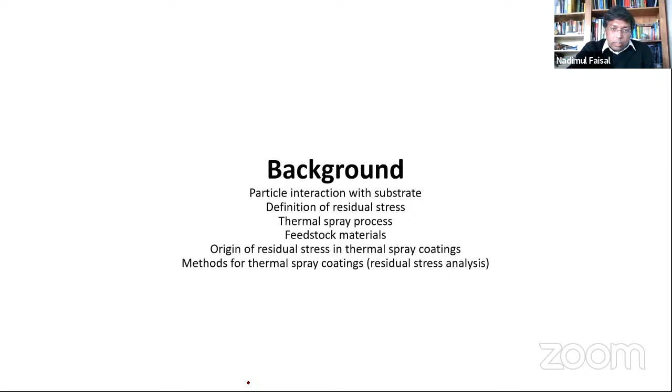I'd like to start with the background in strain measurement, touching upon some of the basic things. Let's see what happens in thermal spray. To start with, we need to know why residual stress analysis is important. We don't want to go into detail, but adhesion, fatigue, and other tribological behavior are very important for such coatings or any material. So residual stress is important. Now, in this presentation, I'll be talking about how to measure it, and what different techniques are available.

So there are 3-4 techniques I have prepared. To start with, we know that in thermal spray, you've got particles at very high velocity and temperature, which interact with the surface. Now, the surface can be of various shapes and sizes. Here you can see on screen, it is a thick sample or thick combination with a thin sample. You can be spraying in corners or bends, or you can be spraying on rollers. So in all these cases, the geometry and shape of the substrate will have an impact on the strain which will build up during thermal spray.

So there are a number of factors which can lead to net residual stress. These can be different thermal spray techniques, process parameters involved, as well as the temperature and rate of cooling between passes. If you're doing preheating, or post-treatment heat treatment can be done, service loading, shot peening, as well as the coating material and substrate materials - all these will have an impact on the final coating manufactured.

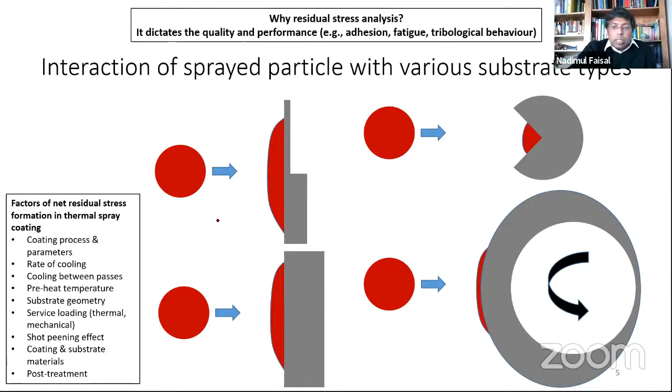Right, so this is what happens. Now, if you see on the screen, the desirable shape and size is the one you are spraying on. But during this thermal spray process, something happens at a very small scale. Some deformation will happen because of spraying at high temperature, and then you end up getting a substrate or sample which has changed in a few minutes or seconds. However, when you develop your process parameters, you assume a number of things. So you assume the substrate is constant, with particular properties. However, these things change during the thermal spray process.

So most of the research and development work done is on flat test coupons. However, when you deploy in real life, they are not on a flat substrate - it would have a different geometry, shape, and size. And because of that, that leads to uneven residual stress buildup. A lot of things are unknown if you're spraying on corners, bend curvatures, or grooves. And from my experience, I know that residual stress is not a common testing protocol in industry, either because of lack of resources, expertise, or maybe lack of interest.

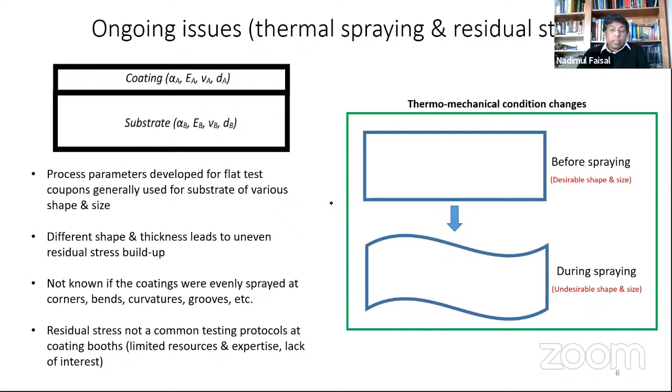So if we do a Google search looking for what sort of shape and size thermal spray coatings are done, we come across - if you just search for ball valve thermal spray - examples where you've got different shapes and sizes. So if it is different shapes and sizes, the thermo-mechanical conditions will change, and that is a problem here, because that determines the quality of the coating.

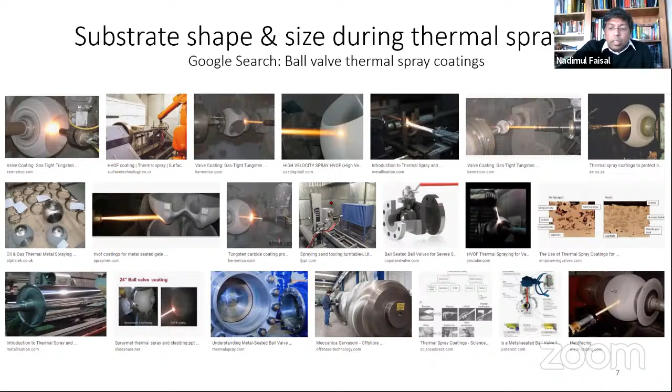In particular, if you're dealing with coatings on ball valves, you would know these are a very expensive set of coatings. And if it is not properly done, and if you operate these ball valves with little contact with the accessories or contacting surfaces around, it can scratch the surface, which can lead to permanent deformation, micro cracks, a groove, and that can not be helpful. So then you have to replace the ball valve, or you have to replace the coating, and that is an expensive process. In the UK, it can cost you many thousands of pounds.

To start with, residual stresses are internal stresses which exist in the material part without the application of any service or external load. These can be induced during manufacturing process, and there can be global stresses, or macro stresses, or they can be ingrained at grain level or atomic scale.

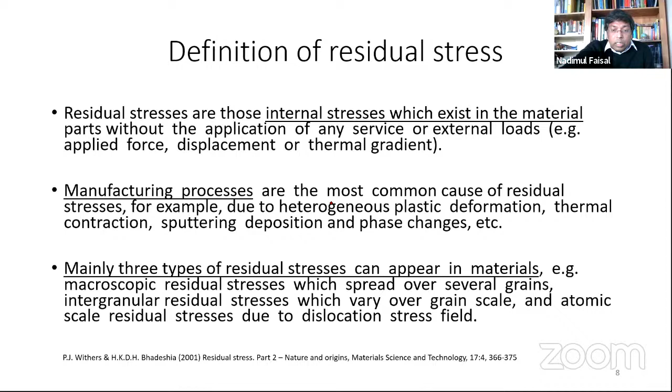A lot of work has been done in this area, and there's a lot of literature available. I would like to read this article, the original source of these definitions, as well as a number of textbooks if you want to know much more about residual stress. In the last 20 years, some standards have been developed. You'll find drilling and X-ray techniques, but you will not find neutron diffraction-based standards, because it's still in development stage. So if you are interested, this may be a good starting point to know about residual stress methods.

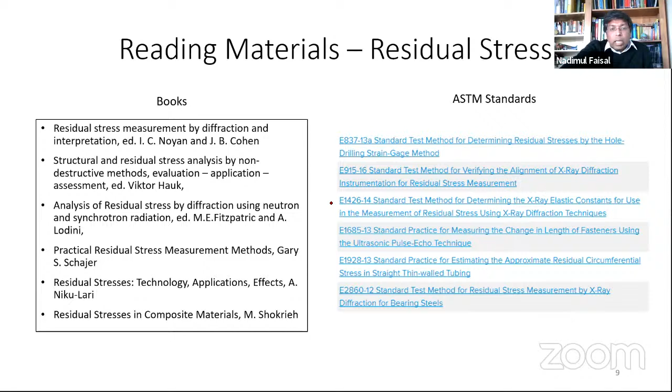In thermal spray process, what happens is the powder particle or feedstock material is sprayed in an environment at very high velocity and temperature, which propels through the environment, and the particle lands on the substrate. Then, layer by layer, you can build the coating.

If you spray only a few particles on the substrate, you can see in the image here it is a grit blasted surface. What we did is try to spray and then see how it will go deep inside those blasted areas, because that will form a mechanical interlocking, and that is what happens if you want to improve the coating adherence with the substrate. So this is the image we tried to capture.

Now, all of this, the first layer, is very important because that is interacting with a different material with different mechanical properties. So the adherence at that point of contact is very important.

As you manufacture the substrate, it will have an impact on the surface you produce. Grit blasting will change the surface properties. Some of the strain will change at a very small scale, but it does have an impact. But these are necessary - if you don't do grit blasting or roughening of the surface, the coating will not adhere. So these are the natural processes we have to follow.

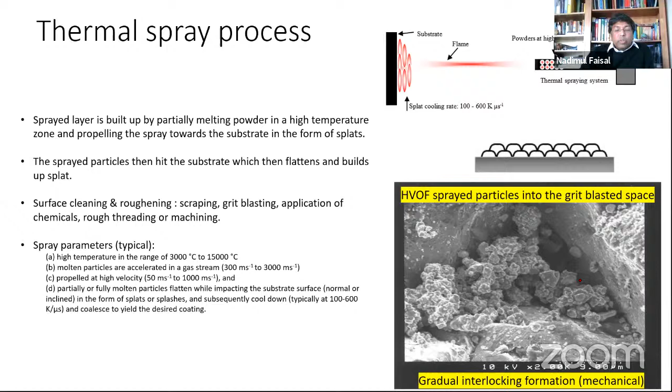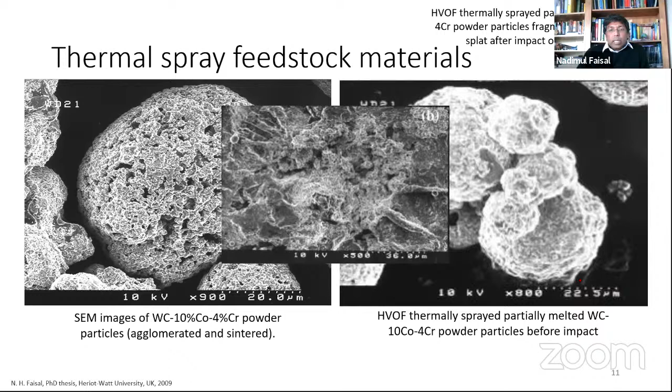The examples of powder particles on the left side are before you spray, and on the right side when it is going through a spray and before it lands. We collected some powder particles, and you can see the surface is partially molten and a few particles are joined up, and that will eventually land on the substrate and form a splat-like structure. So either it forms a proper splat or it can disintegrate into smaller particles. In the first layer, it will interact with the rough surface, and that is where the mechanical interlocking would happen.

To understand what happens theoretically, we did some work using molecular dynamics simulation technique. The first work we did with Dr. Saurabh, where we investigated copper powder particle on copper substrate. A couple of years ago, we did a project with our group's final year project students, where they did a simulation on multiple particles sprayed onto a substrate.

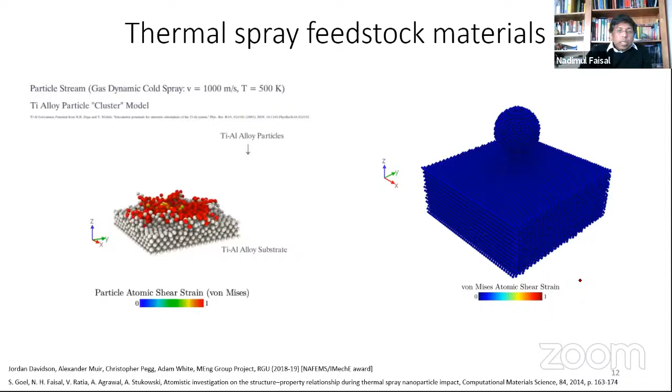You can see as it is sprayed, the strain builds up. Based on the size of the particle, you can see some of the features in it. Here on the right side, the particle size was large enough - you can see how the strain forms and where it forms.

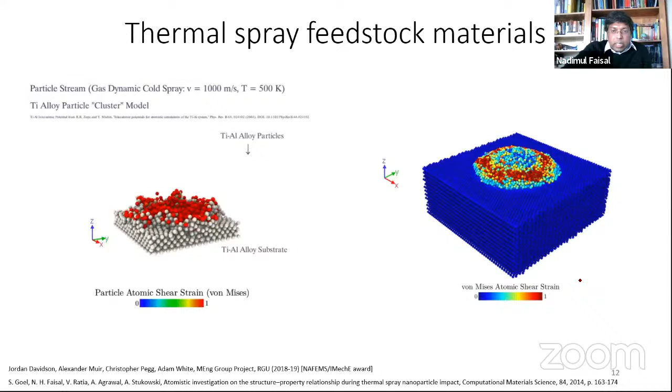These are important things to look into if you are thinking about developing coating of very small size. As well, if you work out for one layer, you can have multiple large particles sprayed, and you can get the strain particle by particle or layer by layer. These are some of the recent work. We know there are about 10 to 15 total publications in this area where molecular dynamics has been investigated for thermal spray application, so there's a lot of scope in this area.

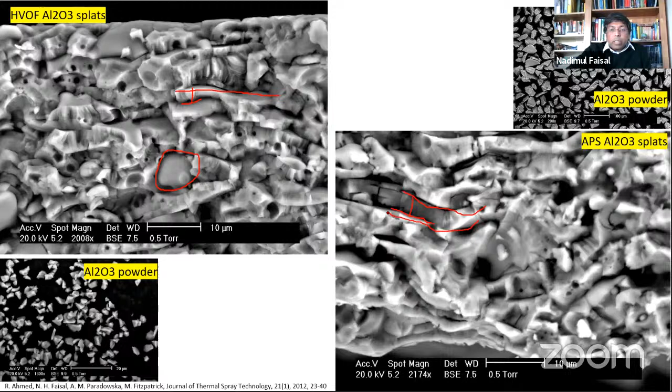And alumina, you know, is a very brittle material. Now think about these getting sprayed layer by layer. These are not so uniform. The splats are not so uniform, but there are some patterns you can see. So these would have a huge strain because these are sprayed at very high temperature, so the strain will be significant.

Assume you're using this coating for some tribological loading or application, applying some load on the surface. Because this is a brittle material, the load will not transmit to the next splat. So it will apply load and it will crack. Whatever you observe, you will be observing the failure on the surface, on the top few splat layers, because the load transmission may not be so easy. So you may not get proper tribological properties of the thick coating itself—it will be mainly surface properties.

However, if you're using a different type of material which has got some ductility as well, the load transmission will be different, so tribological properties will be different. Now, with this inbuilt residual stress, that will have an impact on the overall failure of the coating.

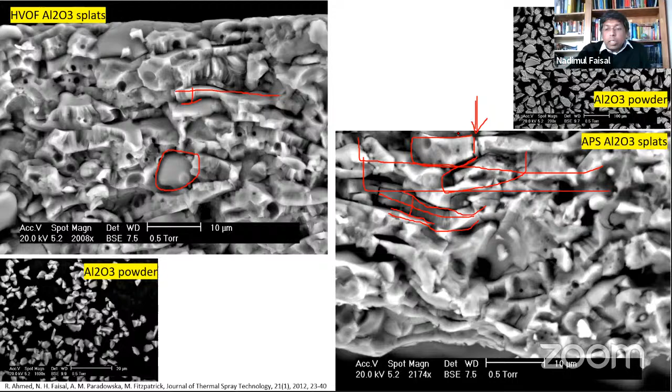In thermal spray, there are some factors because of which residual stresses build up, and those few I would say are: the quenching stress, the peening effect, the deposition temperature, and the phase difference. Each of these, in combination, will have an impact on the residual stress buildup.

So assume you have got a single particle landing on the substrate. Because of high velocity, you're likely to see a little deformation—plastic or elastic deformation, both could happen. The particle will become flat, and then the particle will have a quenching stress. At the same time, phase transformation could happen.

That can lead to a volume change. As soon as the volume change happens, the strain will build up. Then, based on the velocity and temperature, local bonding will happen with the substrate. So a lot of events are happening in this small volume, and that is very important—a lot of data is getting generated.

And then if you build up layer by layer, powder particle by particle, you can end up getting a thick coating, and eventually you will get a macro residual stress. Right, so that is a bit complex.

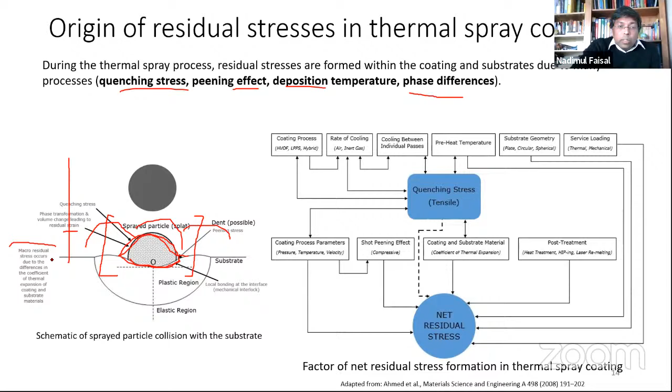If you keep spraying layer by layer, in the first layer, the first few powder particles would have been sprayed on the substrate, and I've just described what could happen. Assume you are building a single layer of a thick coating, and then you have got a number of layers.

Now, as soon as you spray the second layer on top of the first layer, the substrate material has changed. The temperature has changed. The substrate has become thicker. So as a function of time, or as a function of spray passes, the properties of the substrate are changing.

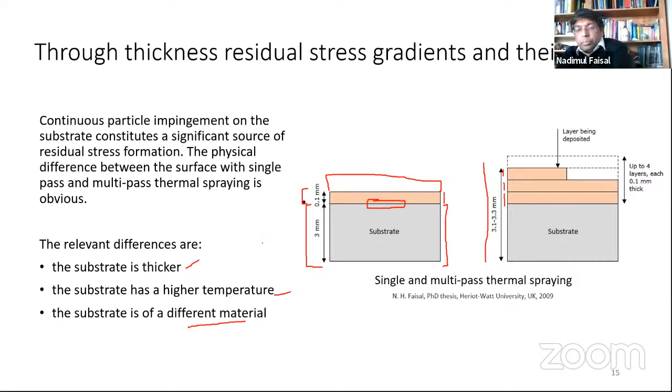Now, I've shown you an example before that with different geometry, shape, and size, things have different thermomechanical properties. We develop some process parameters based on a typical steel or titanium alloy substrate, but you are not designing your process parameters for a new layer which has got new properties. That is what happens in real life, but if you look into the physics of it, that changes.

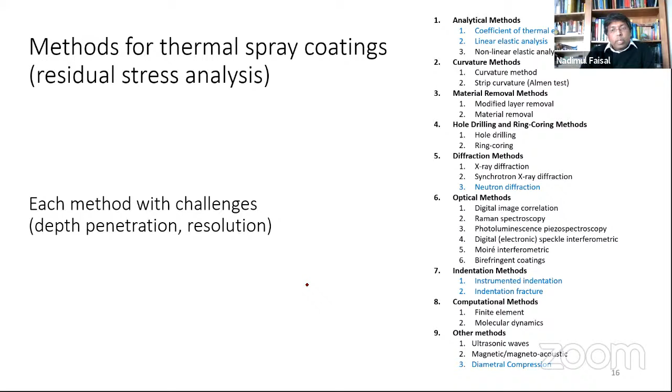Right, so come to the residual stress methods now. There are a number of methods, and those in blue color here are what I'll be talking about in the next few slides: coefficient of thermal expansion, linear elastic, neutron diffraction, and a little bit on indentation and diametral compression. Each of these methods comes with a lot of advantages and disadvantages. The main thing to worry about is how deep you can measure inside the coating and what is the resolution.

So very briefly on the analytical method—this is based on, there are a number of methods in this, but I've just selected one example, which is the coefficient of thermal expansion model.

I've never seen such failure in thermally sprayed coatings, largely because it is thick, it will have a different load distribution, strain distribution, and such loading environment. But that is a likely mechanism of failure.

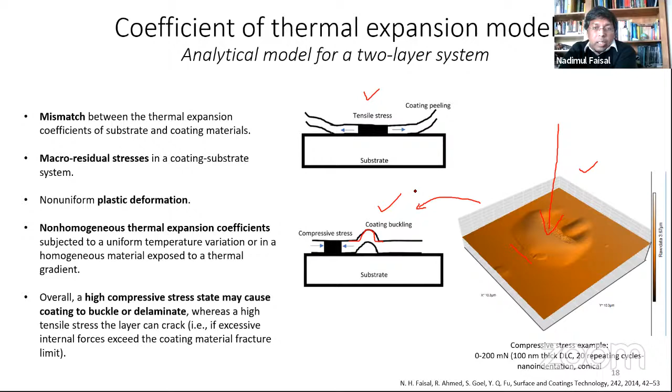Right, so in all these cases, a number of mechanics is involved, and that is something to look into.

Now if you're looking into a two-layer system, the analytical model, the coefficient of thermal expansion model, it is mainly to do with coefficient of thermal expansion. You assume that those properties are constant, you assume it's got one elastic modulus, Poisson ratio, and you use this model to calculate an assessment of what could be the likely strain or stress. But it is very far off from the reality.

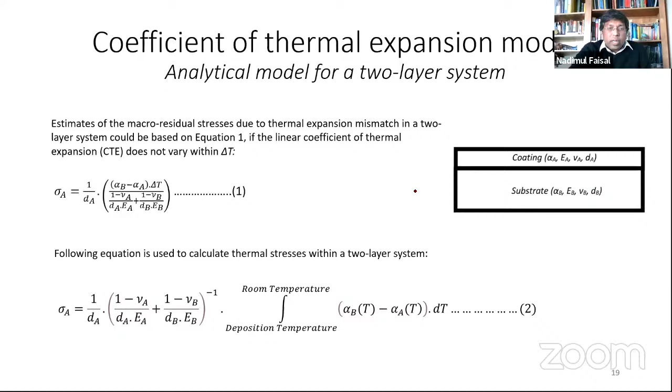So here we did some analysis on a multi-phase material. You can see it was a mix of molybdenum carbide with alumina on a Hastelloy X substrate. Here we selected some of the properties, or measured some of them, some data coming from literature, Poisson ratio, and the thickness was the final thickness. We selected the coefficient using literature values. For some materials you may find, you may not find, so you find some of the property, or you come up with a property which is as close as possible.

So you calculate the thermal stress, and you can see these values are very high in megapascal. Later on I'll show you that the experimental values will be about 10 times lower than these. So in my opinion, doing analytical calculation is good to understand, but it is not a very real value. It may be useful for some other technique, for thermal spray I don't think it is so helpful.

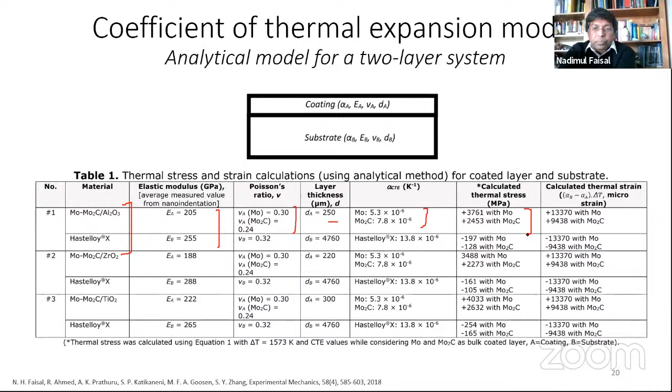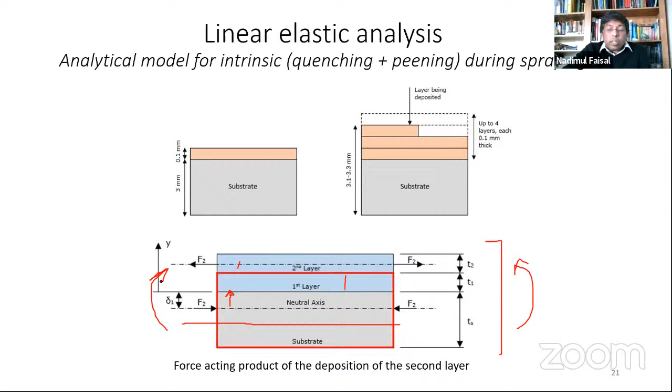Because if you do layer by layer, the dynamics, the strain which builds up in the substrate, it will change because the neutral axis with the thickness will be shifted. For a single layer, the neutral axis will be somewhere here, but if you build up another layer, the neutral axis will shift, and that can lead to bending into the sample. It depends on tensile or compressive residual stress.

Right, so there are challenges. That's what we've got a number of techniques for. So let's start with neutron diffraction.

Recently we did a review on what different diffractometers are available worldwide. These are in different continents. The most frequently used sources are ISIS Rutherford Lab, and another one is Australian Nuclear Science and Technology Organization. What we have seen is these two labs are frequent users of these facilities for thermal spray coatings, where they can investigate the strains.

So strain is one thing they can measure, but there are many other things which can be measured, which I characterize as microstructure - maybe texture, phases, lattice parameters, pores, cracks, anisotropy, or maybe chemical impurity, dislocation. All these things can be investigated using neutron beams.

Now there are two different types of beams, either monochromatic or time of flight. Monochromatic source can do single phase, however time of flight can do a dual phase like steel or other materials. So the one I use is the ISIS one, it is time of flight based, so you can have a multi-phase coating material or substrate which can be investigated.

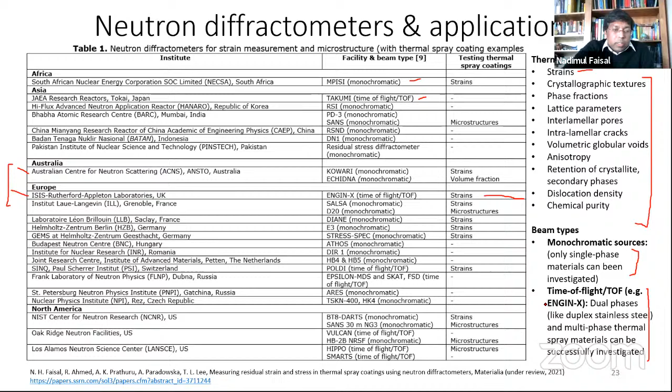So the manuscript is under review, however you can see the preprint available online.

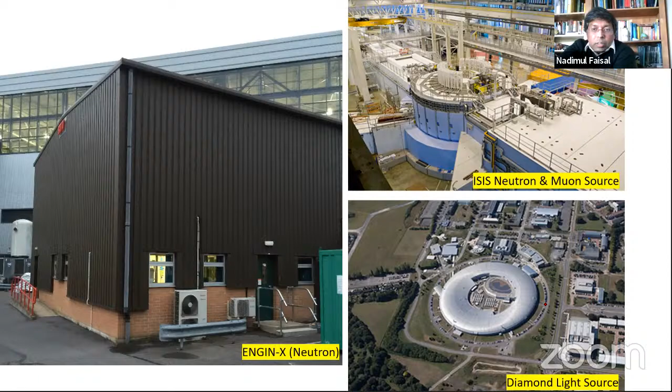Right, so what happens, these facilities are not available right away. You have to apply for beam time through proposals. If your investigation is innovative, you may get beam time, because these are very expensive experiments, so it requires a lot of preparation.

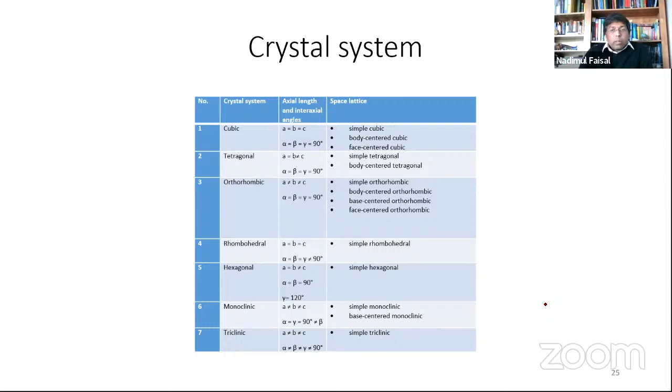As well as we need to know about the basic crystal properties, crystal systems, because as soon as you're dealing with any neutron or synchrotron or X-ray, these things communicate with crystals. So we need to know what crystal system your material is - a basic one, you don't have to go too deep, at least what crystal system it is, cubic, hexagonal, monoclinic, or so on, because that can help you to analyze the data.

A little bit more about learning the crystallographic planes, because in these diffraction methods, you measure the D spacing and change in the D spacing. So you need to know the Miller indices, and there is some reading material listed here which can be very handy. So if you are spraying or manufacturing coating, you would know what your feedstock material is, so you can do some basic characterization to work out how the crystal looks, what they are.

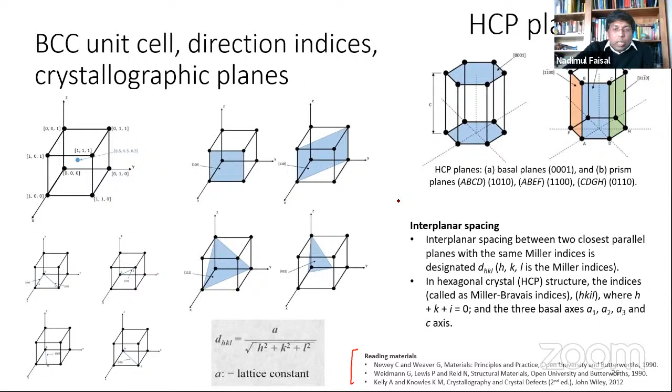All right, so how the neutron works. Neutron is neutral. It is different from X-ray. X-ray has got negatively charged electrons. If you're using X-ray on materials, it will interact with your atom, because an atom has electrons. So X-ray, being electrically charged, doesn't allow it to penetrate into the sample. However, neutron is neutral, so it can penetrate deep inside the material. That's the advantage: you can read the strain inside the volume, which is not possible using X-ray. You can use synchrotron to an extent, but in my opinion neutron can give you much better results. It is expensive, but the methodology is very similar to what you do in X-ray.

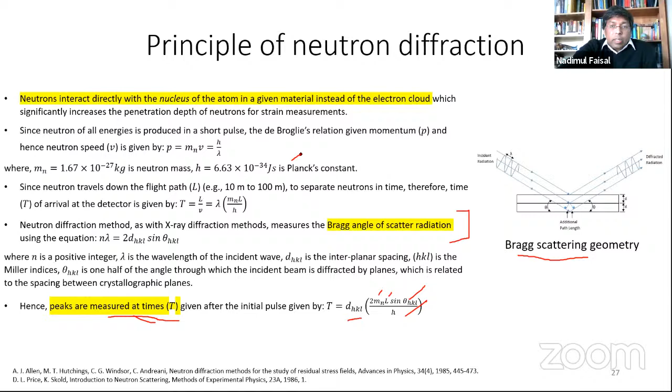The fundamentals are the same. You can use this geometry, or Bragg scattering geometry. One thing you have to think about is that your peaks are measured at time. So what is the time? You can use DHKL, the mass of neutron, the length of the flight path, and theta HKL, where H is the Planck's constant. These things can help you get started with the measurement plan.

If your selection of D naught is not properly thought about, then you may get very high or very low strain. So in our experiments, what we did was take the coating off from the substrate and crush it into powder form. That's one way. Or before you spray, you can use the feedstock powder itself as your sample for D naught measurement.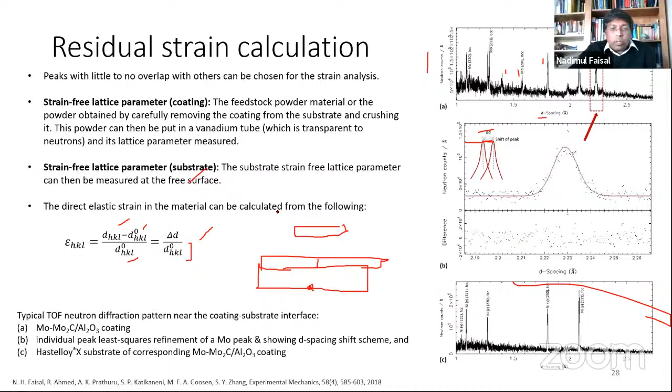Now, a few details about the source itself. This one is based on a tantalum target. It is based on time of flight. The resolution is 50 microstrain. If you have samples less than 50 micron, I'm afraid this will be a challenging one.

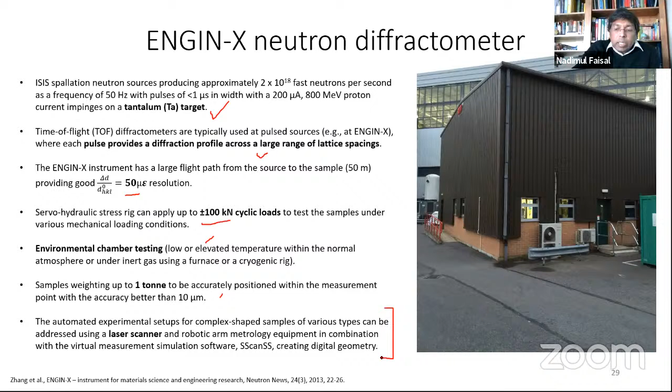You can also apply fatigue loading on your samples. You can deploy different temperatures, cryogenic temperature, or furnace. You can have large samples or small samples, or you can do some scanning of the sample if you pinpoint which coordinate or location of the sample you want to analyze. So these facilities can be accessed.

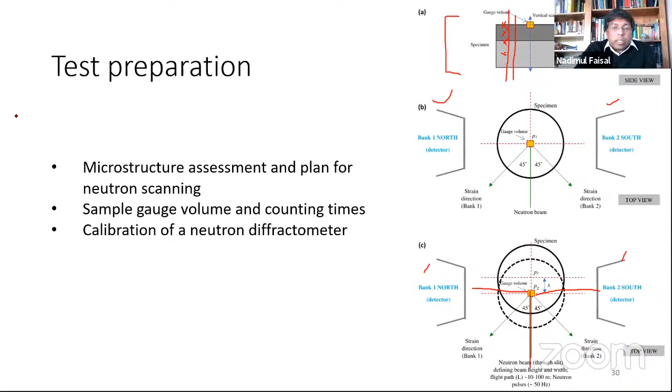Before that, you need to prepare and think about the material you are going to investigate, because as soon as you do a diffraction, you will be getting a spectra, and you have to analyze some of the data right away. You have to think about the gauge volume and make sure the instrument is calibrated, and these things can be done by the instrument scientist available there.

One of the things to worry about is the volume you are going to investigate. Assume this is the coating, and that is your very thick substrate. Focus on the coating part. If you have a beam going into this space, this is the surface above, it's open space, so you don't have to measure that bit, but you have to submerge the beam inside the coating.

So how deep should you be? Remember, these coatings are very thin - 200 micron, 300 micron are typical thicknesses. So there are only a number of points you can analyze. If you are too close to the top surface... typically I would say go 50 micron deep, and then, depending if it's thick enough, you can have 4 or 5 data points from the coating, and then again you can do from the substrate.

Now the interface is important. If your point is here, you may get a lot of overlap coming from coating and substrate. If your point is here, you may get largely from coating and a little bit of substrate.

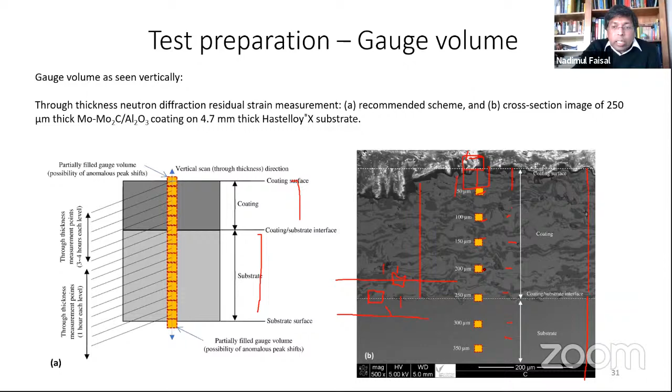This is some of the thing to worry about at the start of the experiment, because once you set the experiment, it will run for hours. For the coating part, it takes a lot of time - for these 4 or 5 points, you may end up spending 24 hours of continuous diffraction. However, for the substrate, you can take less time, maybe an hour or half an hour or so. These decisions are taken based on the material. In our cases, we typically take 3 to 4 hours per point to diffract and get nice, useful data for analysis.

So before you set up all those things, you would like to do a fast scan to find the reference point - where is the interface, where is the top surface, where is the bottom surface of the substrate - so that you can write the code for how many data points you want to analyze in the coating, how many in the substrate, and then set up the time for each data point and let it run.

Now, this is how you assemble your sample. You can just put it in front of the slit - this is the slit, and deep inside, the beam is coming to the sample. This is the top view, so think of this as a small test coupon, though it can be a large sample as well. You can put powder material in front of it, or put that powder material inside the vanadium can.

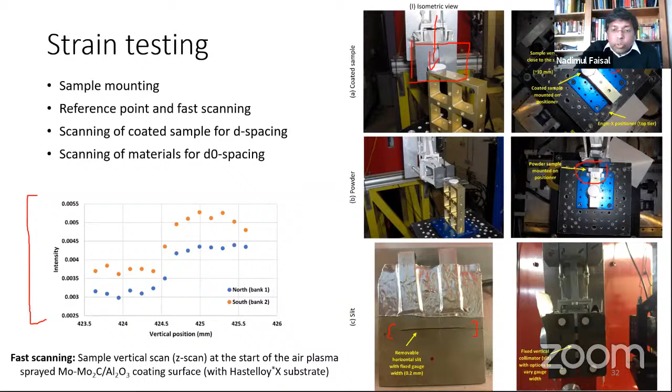Now, if you're playing with the gauge volume on the coating, you may put some slit in. This is a very useful slit for testing some of these coatings - it's just an aluminum plate with a very thin, 0.2 mm wide slit in it.

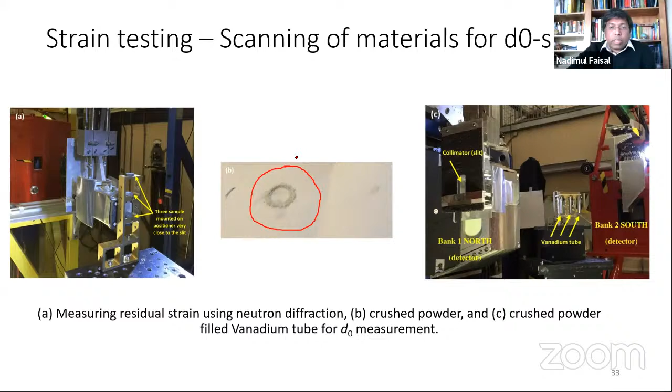If you're analyzing your D-naught for the coating, you have to crush it as small as possible. We know that it can have some impact - it means you can introduce some shear into it. That is a possibility. Or you can use fresh raw material, raw powder, for the purpose.

Once you have done that, then you have to do a number of analyses. You can do an average of all peaks, or you can analyze individual peaks. If you've got a number of peaks, it will be time consuming, but you can have a much more detailed investigation.

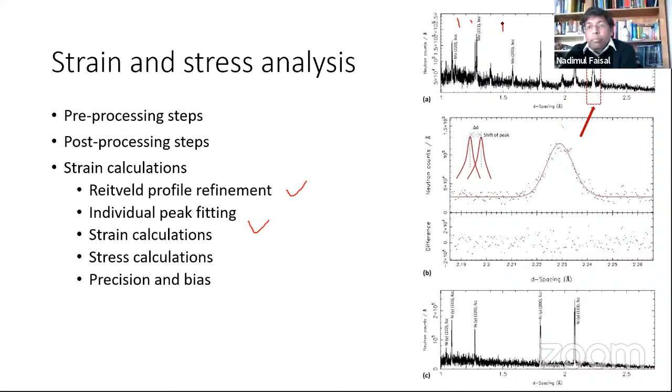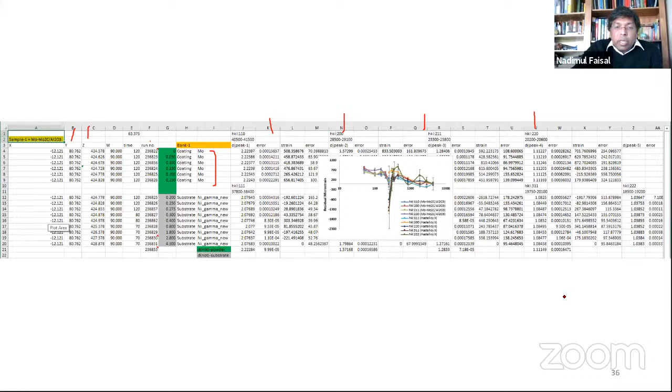So there are softwares available for such purpose, and this is very data intensive. You have to do it for each point, for each layer, each level for different HKL planes, and take the average. And again you have to do for the first bank, then another bank, and take the average. If you've got a number of samples, you can spend weeks and months analyzing all this data.

So the interface is an important thing to worry about. If you're analyzing within 50 microns on either side of the interface, you have to be very careful. You can expect huge error if you're not analyzing the data carefully.

However, a lot of work can be done in this domain, and a large set of data of different types can be investigated. In my experience, this is an area which has been very least investigated, at the interface of these coatings, a very steep rise in residual strain can happen.

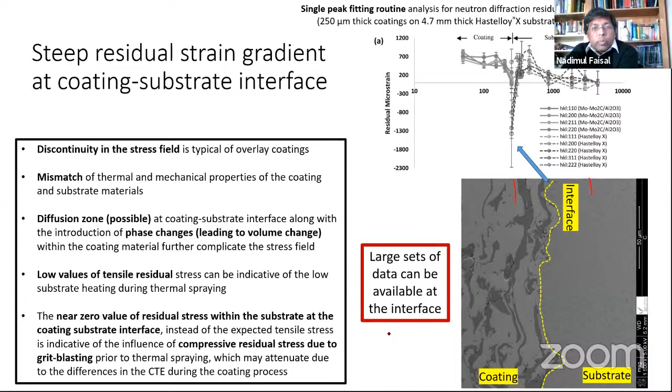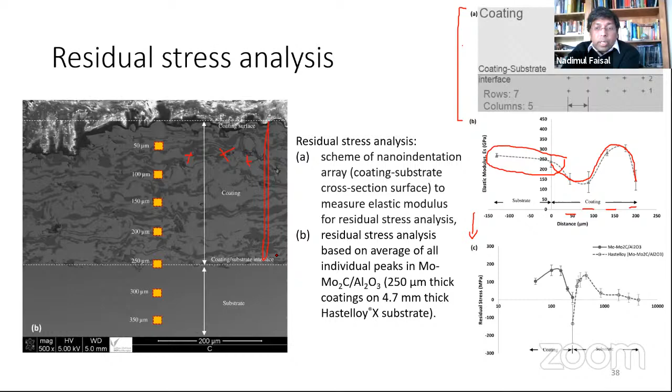So this is one way you can use it. Or if you want to simplify it, you can just pick one value to convert into stress. These are some examples we have done on hydroxyapatite biomaterial, as well as alumina coating.

You can see here for one coating type, the strain is largely tensile. For another type, you've got a lot of compressive strain. We did indentation on those two samples, and you can see the surface fracture is a bit different. So the high tensile residual stress here would have impacted the failure of this plasma sprayed alumina coating.

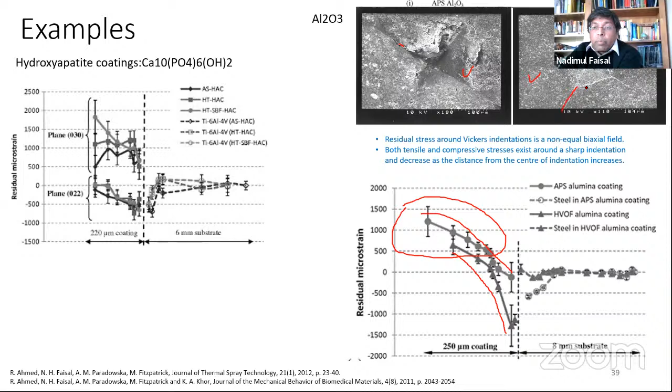However, for HVOF, the pattern is comparable to some of the standard fracture mechanics in indentation. There is very little work available where comparative analysis has been done.

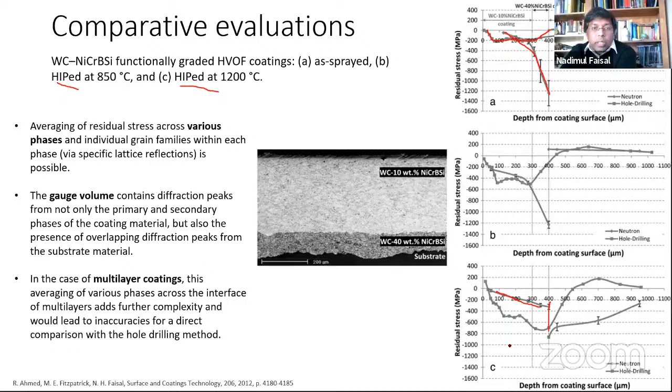Moving on, this is a new method, I would say. The method is not new, but the application is new. Diametral compression method is used mainly in geomechanics to understand the tensile strength of geological samples.

And we applied a compressive load. Because of that, the coating came off, and before it came off, we measured some set of data about the strain. So you will find some fundamental theory, the theory involved, the equations involved.

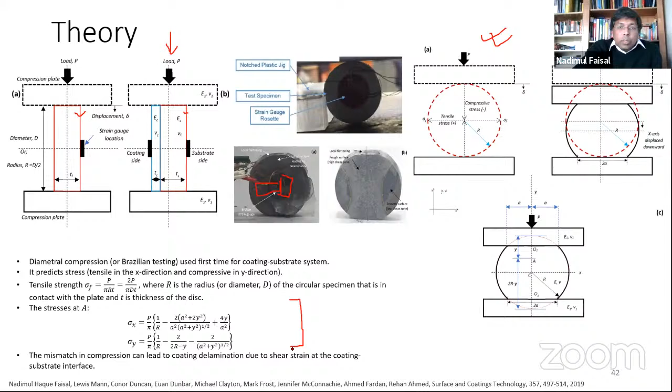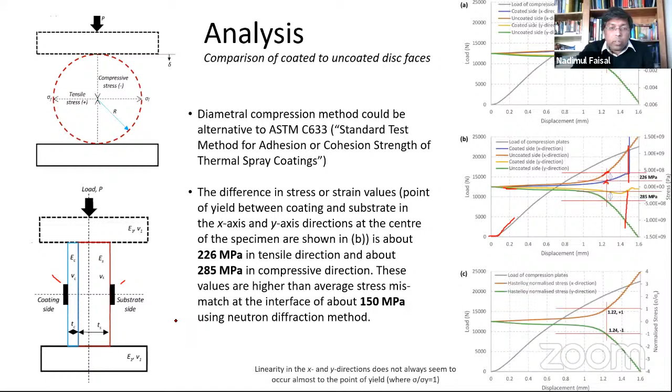So you can have a relative strain mismatch, which can be investigated using this method. This could be an alternative method compared with the standard adhesion method used in thermal spray coating. We compared this data with neutron results on the same material, and they were way off because these are two different techniques, but it would make sense to investigate more. If you want to have a look, you can cite this work.

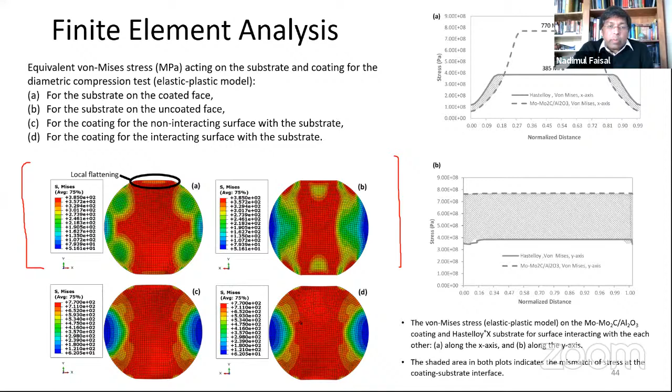Then we did some stress analysis using finite element methods. You can see there's a huge mismatch on the substrate and coating side. If you compare the coating side and the substrate side at the interface, you'll find that once you compress the coating surface and substrate surface, they have different strain or stress distributions. This would have an impact on the overall quality of the coating. So we think this can be an alternative way to measure adhesive strength in thermally sprayed coatings.

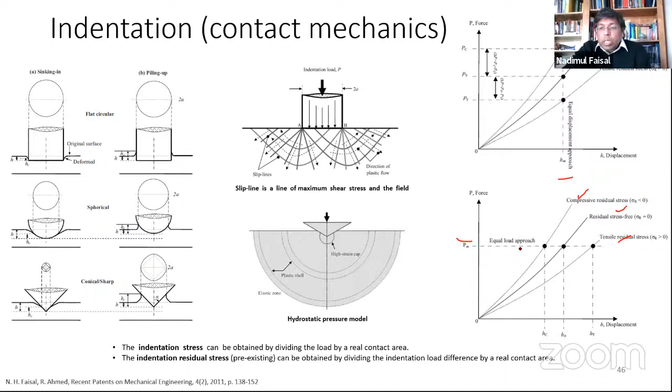Now, if you instrument these machines using force and displacement transducers, based on the type of material you've manufactured, you can get different profiles. You can have a profile from residual stress-free material, and compare it with compressive stress material versus tensile stress material. The load-displacement profile will shift a little bit either way. Based on an equal displacement approach or an equal load approach, you can work out the load difference or displacement difference, and then apply different equations to work out the residual stress when loading an object using either of those probes. This is a summary of some of the 5 patented methods—meaning these equations may be deployed in instruments to measure residual stress using the indentation method.

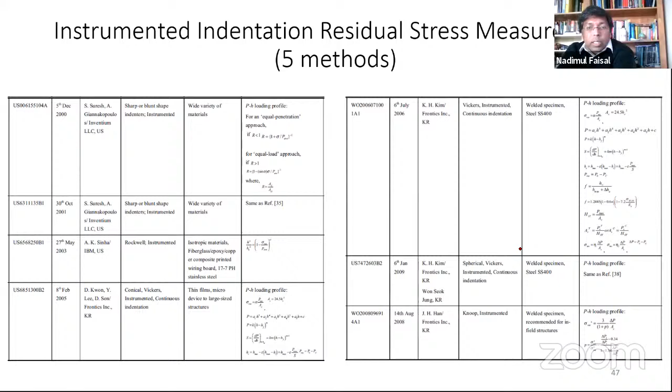If you want to use a fracture model, these are some of the fracture models. You can see Hertzian indentation is very well known. Then there's median radial crack—during loading, you can see this type of crack forming. When you unload, you can have lateral cracks pop up. There are two different crack types: Palmqvist and median crack.

During my research thesis, I was working on thermal spray. Thermal spray doesn't fracture the way glass or ceramic materials fail. In thermal spray coating, there are a lot of edge cracks and other smaller cracks which you can't compare with the standard models. This requires a different way of measuring cracks, where you measure them using a microscope or some imaging technique. The zigzag length will be higher than the straight path, so if you use a straight path mechanism to measure crack length, you are actually undermining the fracture toughness values.

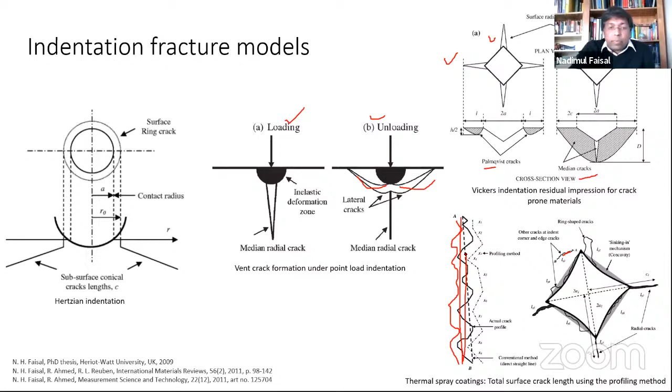There's a lot of literature available. I haven't presented it here in much detail, but if you're interested, these are some of the original works or articles. It will be good to cite them if you want to use nano indentation fracture to analyze residual stress.

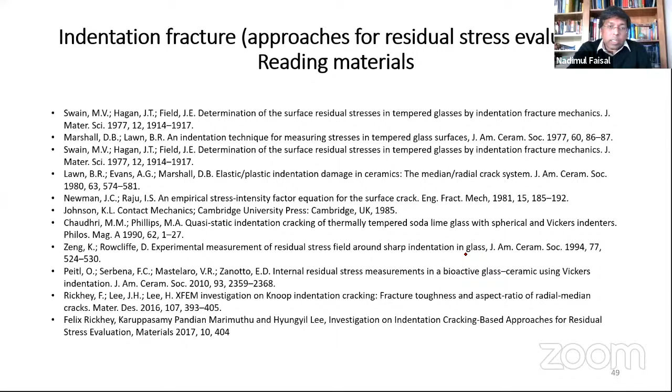Right, so for the last few slides—what next? In my opinion, residual stress analysis on thermal spray coating is a very interdisciplinary area. It requires partnership from material scientists to condition monitoring, sensor application, instrumentation, control, and thermal spray experts as well. So physics, mechanics, materials, and computer engineering—we all need to understand these properties in coatings.

Very little investigation has been done on suspension or solution-based thermal spray coatings. Nanostructured powder has not been investigated much. There are also challenges if you want to measure strain in curved samples—spherical, cylindrical edges, or corners.

In all those methods, I've shown the accuracy, the applicability, or the distribution. It still requires a lot of investigation. I believe that residual stress could become common testing protocol at coating booths. However, we need to train future generations of spray users.

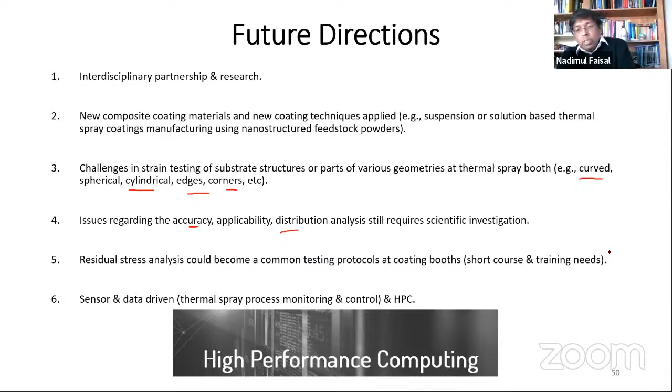I also see that things could go in a different direction where a lot of digitization or digitalization could happen. For that to happen, I think application of sensing methods and data-driven methods, and using HPC or access to HPC, can help analyze some of these properties.

So one of the works we did long ago is based on an acoustic emission sensor, where you can deploy an AE sensor, one or more than one sensor. Here you can see the sensor behind the substrate, and you spray onto the plate. So here we have sprayed a number of layers. It was extreme spraying. We did about 1 millimeter thick.

For each layer we build up, you can see the energy of acoustic emission going up and up. Each of these data points is actually an average of hundreds of data points or hundreds of data files. However, if you analyze each of those files, you can see it has many additional signal features coming either from micro cracks or layer-by-layer cracks which could happen. So this is one of the experiences we have.

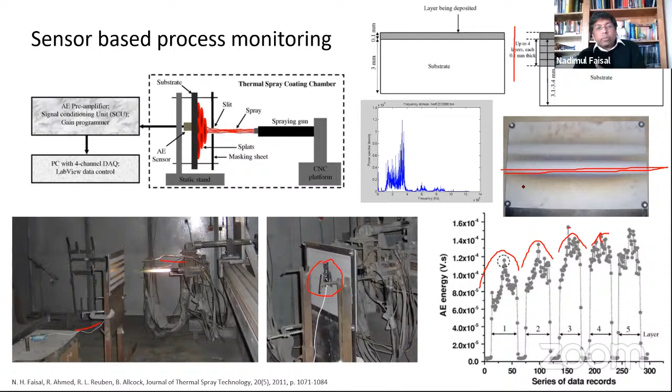However, we think a lot of additional sensing methods can be deployed. There are a number of techniques available. Some of these are commercially available - they have deployed optical methods or pyrometry methods to measure a number of things like temperature, velocity, plume position, distribution, intensity, even weight.

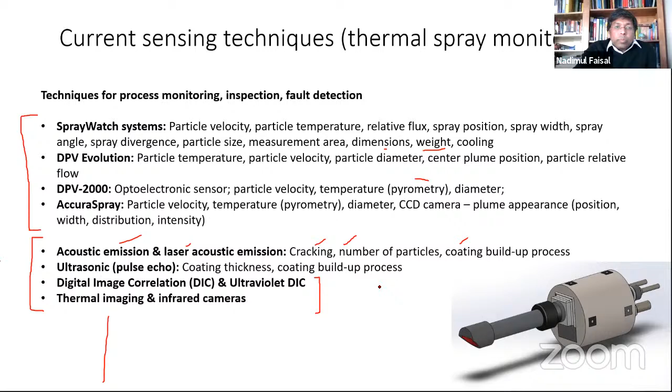They can measure dimensions. Some of these techniques are not commercially available because they're still in R&D phase, but they can help measure cracking or the number of particles sprayed as a coating builds up. There are many other sensing techniques beyond this list which can be deployed with the gun or spray system to monitor the spray process.

So in the last slide, if you want a holistic approach, you can have an initial set of data, and each of these can be integrated with different sensing techniques. There can be n number of sensors. What you do with that data is fuse all of it, and based on the interpretation of the data, if you're looking for strain management, you can build your models.

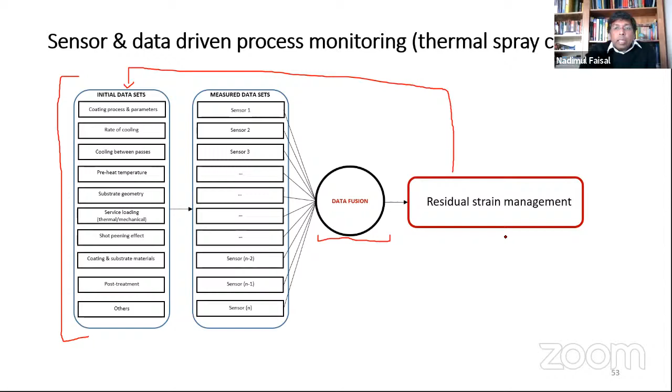You can modify your initial conditions, in situ or off situ. So it requires multi-scale modeling, experimentally and numerically, to manage the strain in a structure like this. Right, so that's me. Thank you very much for your time.